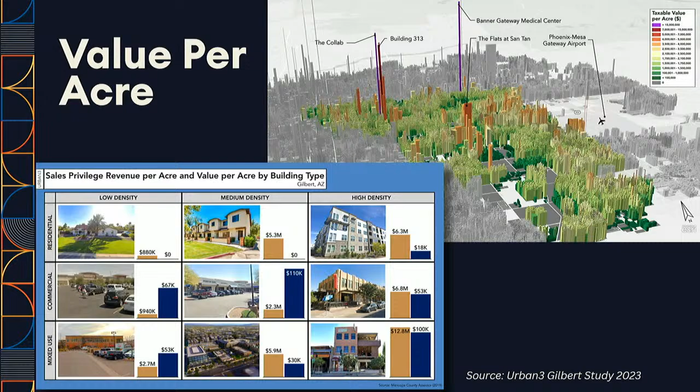So why is maximizing value per acre important? Gilbert is known as a suburban residential community, but most of its revenues to operate the town are collected through sales privilege taxes. This highlights the need to support density in industry-focused areas like the Heritage District, which supports the tax base. By increasing the productivity of industry-focused areas, it supports the quality of life expected by the primarily residential community without adding items like primary property taxes.

What Urban 3 likes to say is stacking your stories means stacking your dollars. Increasing density by just one or two stories, as proposed in this text amendment, can have significant impact on productivity and allow Gilbert to continue to be fiscally sustainable and support responsible growth. You can see the heights are really high in the Heritage District with the Collab and Building 313. And I will kick it back to Kristen.

In addition to the Urban 3 presentation being a driving factor into our request for increased heights, we also took a look into the redevelopment plan, where we ask for the goal of an 18-hour downtown. An 18-hour downtown is essentially a location where you can live, work, and play all within the same area without having to leave that district. In an area like the Heritage District where the parcels are often so small, it makes sense that instead of being able to have a horizontal mixed-use development where you have residential over here and employment over here, you need to build up because there's just not the space to build outwards.

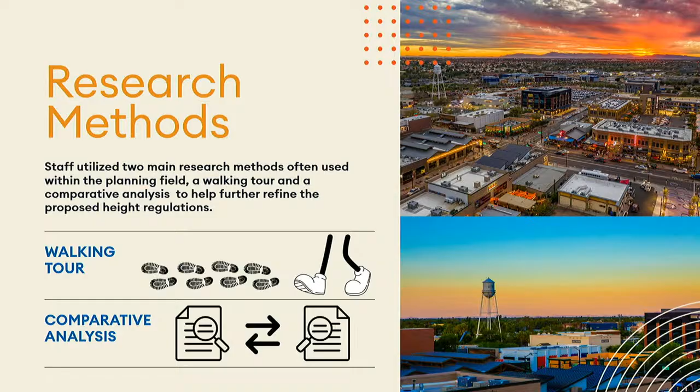In addition to the research already mentioned, we also went on a walking tour of the district, largely because the water tower is a big point in this conversation. It's always asked of us to preserve the view of the water tower, but the question is where are we preserving that view from — pedestrian scale, vehicular scale, outside the district? For this purpose, we went on a walking tour to gain a perspective from the pedestrian scale.

I took 6 pictures from that tour. You can see the water tower is visible from a handful of locations with the current development, but there are also a handful of locations where it is not visible.

All right, and then moving on to the community research that we conducted, we chose these communities largely due to their proximity to the Phoenix area. Some of them are identified benchmark communities, and a good chunk of them are just communities of interest.

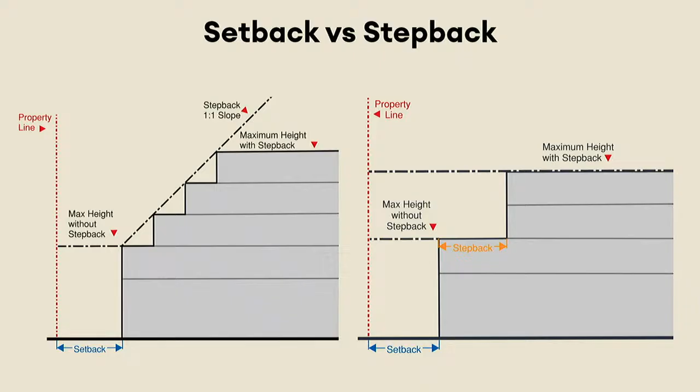The top image is the Chamber site, Gilbert Road and the Railroad, shown at 55 feet. This is a conceptual 3-story building with about 53,000 square feet of parking, ground floor commercial at about 9,000 square feet, with office and amenities above at about 43,000 square feet.

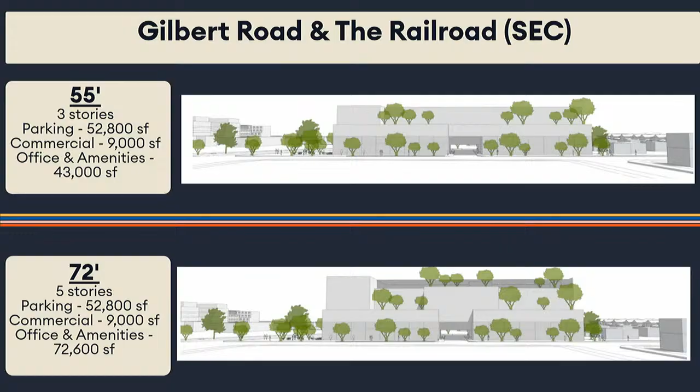If you took that building and added 2 stories to it, your parking would remain the same, your ground floor commercial would remain the same, but you would increase your office and amenities to 72,600 square feet. The bottom image is shown at 72 feet.

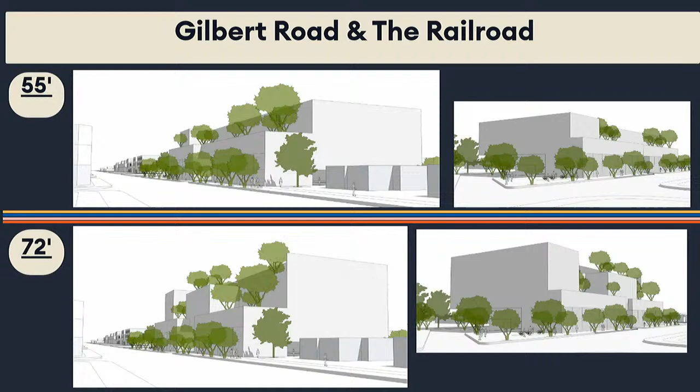And just some additional renderings showing what a step back could look like with this development, and then that development in a larger context of the district.

All right, and then the second site we chose is Vaughn and Oak on the northwest corner. We chose this one because it's a site that could potentially implement your bonus height of up to 90 feet.

The top image is 55 feet, 4 stories. It includes 82,000 square feet of parking, 18,600 square feet of ground floor commercial, with 225,000 square feet of residential stacked on top. It also includes a row of townhomes along Oak.

If you took that building and increased it to 7 stories, you would gain an extra 3 stories in residential, bringing it to 335,000 square feet. Your commercial would remain the same since it's ground floor, 18,600, and your parking would then increase to 128,000 square feet while also keeping those townhomes.

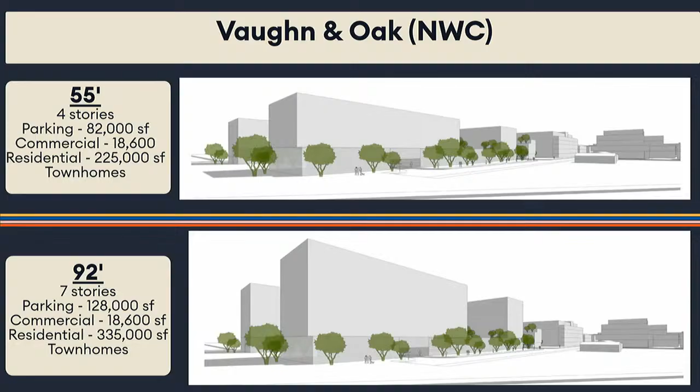And then just those developments in a larger context of the district.

All right, and then just to highlight what the next steps are after this. This is our first step after the initiation that occurred with Planning Commission last month. So we'll bring it to you for study session this evening. Following that, we'll take it to Planning Commission for study session, bring it to Chamber of Commerce for their feedback, and then public hearings with yourselves, as well as Planning Commission, and then study session with Town Council, and finally public hearing for Town Council if we get that far.

Then, just to summarize, our request this evening is just a discussion on possibly increasing the height within the Heritage District, and I am open for your questions.

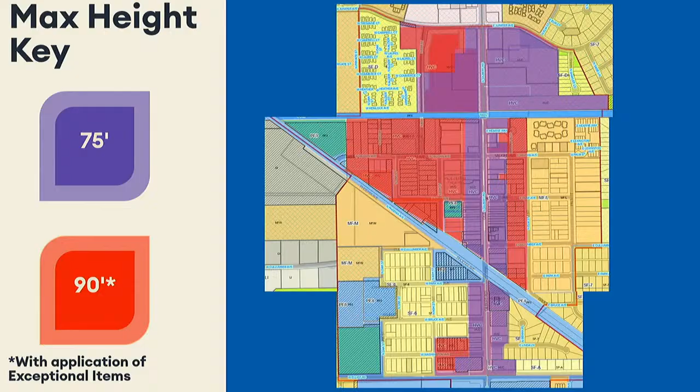I've been to some of those cities that you guys looked at. Cherry Creek, I was there in February of last year. I love walking that area, it's so fun to be in, and that's not necessarily downtown either, it's just a different area. But the height in that area actually gives it its charm, and you see a lot of different heights.

Even the single-family homes go tall. There's a lot of 2-3 story townhomes in the middle of this area because the height is encouraged and promoted there, and it becomes more of a village, more walkable, less car-focused. Interestingly, the parking requirements are significantly lower in those places than in suburban areas, and so I support more height. I think it's a key metric of downtown area, and I hope that the future discussion will be whether we expand the boundaries of the Heritage District so that other adjacent areas can avail themselves of that height opportunity as well.

So Chair Kendall, Commissioner Baugh, I'm going to respond to just a couple of the items you touched on: distance as opposed to touching Gilbert Road. That is something we can definitely explore after this. I know that in our GVC zoning district, near the Cooley Station area, the maximum height is actually 90 feet, but if it's within 75 feet of a single-family zoning district, they can only go to 60. So something like that could potentially be incorporated here as well, but not necessarily single-family, more so Gilbert Road.

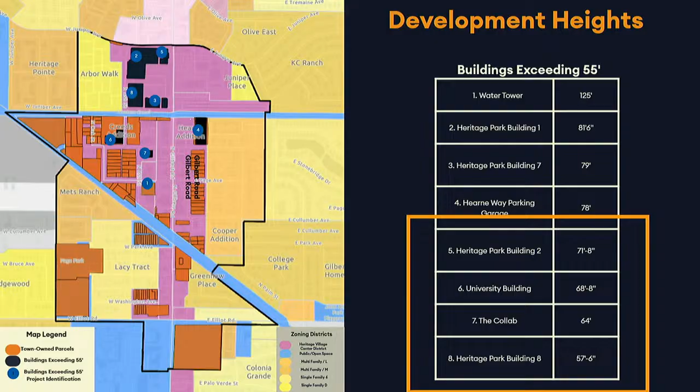Sure, great answer, thank you—a very political answer. In regards to parking, I think every commissioner touched on this, Commissioner Baugh talked about, let's call it the piano key lots. If someone were to go like 75 feet, does that mean they've got to dig a hole so people can park underneath there?

Okay, so they would still be eligible for the AUP or commercial. The AUP only applies to commercial retail, things like that—it doesn't apply to residential. Residential needs to self-park. So for lots that size, they could apply for the AUP, but if all the parking we currently have is eaten up at that point, then yes, they would need to self-park by going underground.

Okay, then I also had a comment on art, because that's very much in the eye of the beholder and what that looks like, but I think you define that. Mike had addressed the economic impact of that. For example, we saw a couple buildings there, the Collab and the university buildings—are those listed here as an example of how much revenue is being generated from those?

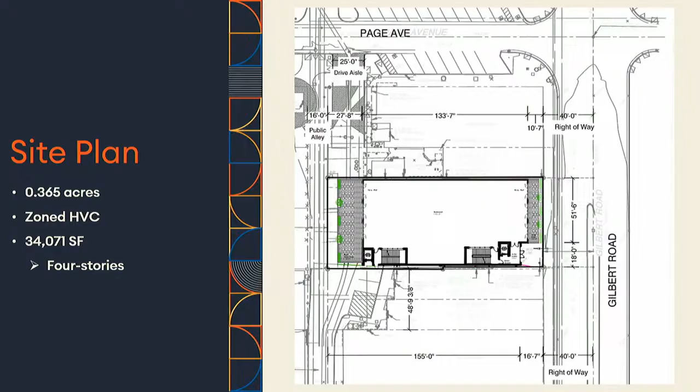The site is currently 0.365 acres. It is zoned HVC, or Heritage Village Center, and the proposed building would be approximately 34,000 square feet in size. It will be 4 stories. The first floor would contain a restaurant with outdoor seating areas, with an outdoor patio at both the east and west ends of the building. The second floor would be a retail showroom. The third floor would be office, and the fourth floor would be restaurant with a rooftop terrace.

Landscaping within the Heritage District is typically a little minimal compared to other areas of the town. However, they are proposing some landscaping with this project, primarily found on the east and west patios. The landscape materials proposed are Texas mountain laurel for the trees, and Huntington Carpet rosemary and dwarf myrtle for the shrubs and ground cover.

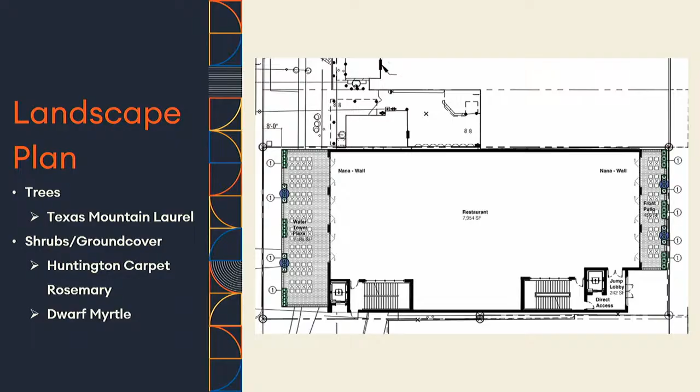One thing I'd like the commission to provide feedback on is that while Texas mountain laurel is an approved tree species within the Heritage District Design Guidelines, when you look at some of the other street trees up and down Gilbert Road, particularly with some of the newer developments, you'll see they've used red push pistache, which is the street-themed tree along Gilbert Road in the Heritage District. It's a pretty hardy, drought-tolerant tree, and it's a very nice-looking tree, particularly in the fall as the leaves start to turn colors.

I'd like to get some feedback from the commission on street side landscaping. Gilbert Road, in the Heritage District Design Guidelines, is the street section designated in that document, and it calls out a landscaped area or zone between the roadway and the sidewalk to provide buffering and enhance the pedestrian experience. So I'd like feedback on incorporating landscape materials within that zone along the Gilbert Road frontage.

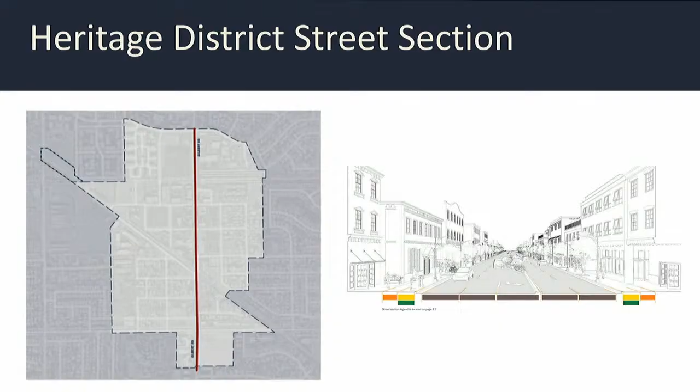With the building elevations, they're proposing a 4-story building, 55 feet tall, but actually 60 feet to the top of the mechanical screening, that's the area popping up you see on the drawings. They are proposing a mix of materials, including fiber cement panel siding, red masonry brick, and CMU block.

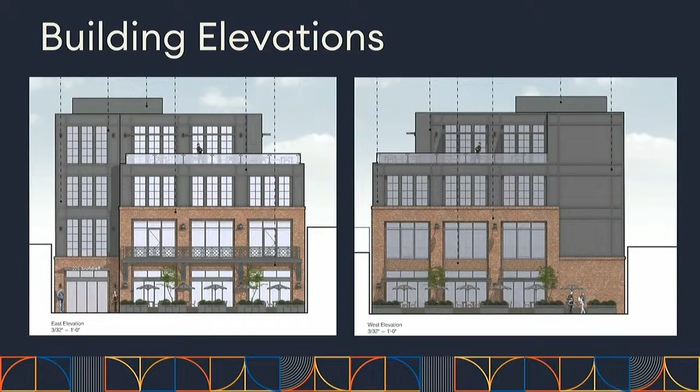On the east and west elevations, the Gilbert Road and Water Tower Plaza facing sides of the building, those are primarily fiber cement paneling and red brick materials. At the balconies and rooftop terrace, the balconies will have metal railing, and the rooftop terrace will have clear panels.

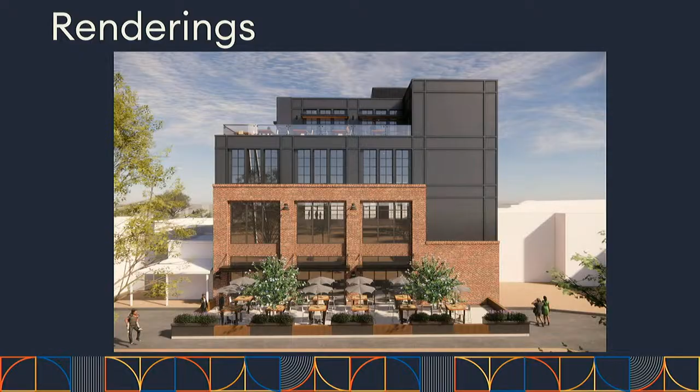I have some renderings of the building in context with the adjacent buildings so you can see how it fits with existing development. This is the Gilbert Road frontage we're looking at here. This is the west side of the building, which would be facing the Water Tower Plaza.

I'd like to let the commission know this proposal is in its first review with staff. We're bringing it to you to get input on the elevations and landscaping, to incorporate that into staff comments as we send them back to the applicant. That concludes my presentation, and I'd be happy to answer any questions.

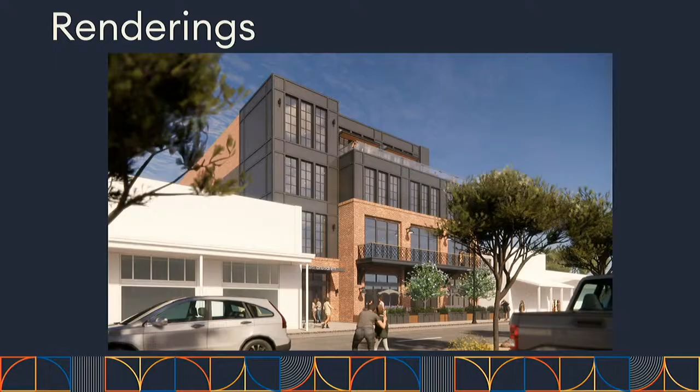I love the red push pistache as well, but I think if this is a tree that's already approved, I think the rendering looks nice. I don't think we need the same tree everywhere, so I'm fine with what they've proposed if that's the tree. If I could, yes, that would be a Texas Mountain Laurel in the rendering.

Okay, and then regarding the elevations, let's see, it's the south elevation, right? Yeah. I'm good with the north elevation. I'm good with the south elevation too.

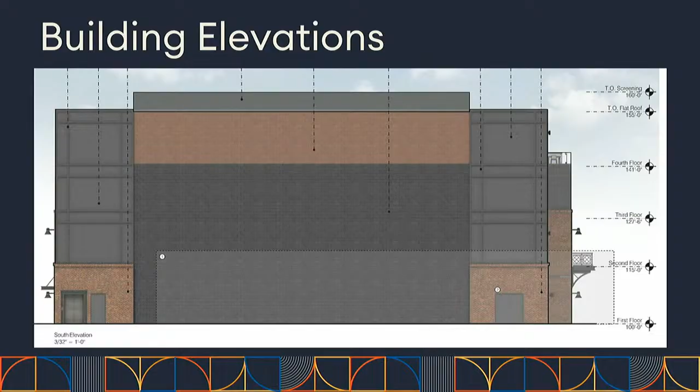I think if you're wanting more opportunities for design options, you could run a layer of honed block similar to the lines that you're seeing on your perimeter. What were those panels, a concrete? Fiber cement. I think that's an opportunity. I don't like to give direct guidelines on design, I like design teams to have flexibility. But you've got those perimeter lines that you could, within the same material, just hone it, and then you've got more lines carried through from east to west instead of having it kind of boxed out in the middle.

But I think the material selection is nice. Thank you. Commissioner Baugh, Commissioner Bigelow, any questions?

When we looked at this project last year, there was a lot more, there were trees and a lot more greenery input, and the building overall, I'm assuming, is a similar height, but is a completely different style. Do you know the reason for such a drastic change in the overall concept or style of the building? I don't know, pardon me, Mr. Chairman, Commissioner Bigelow, I don't know specific reasons other than that perhaps the owner was looking to go in a little bit of a different design direction than what was previously approved.

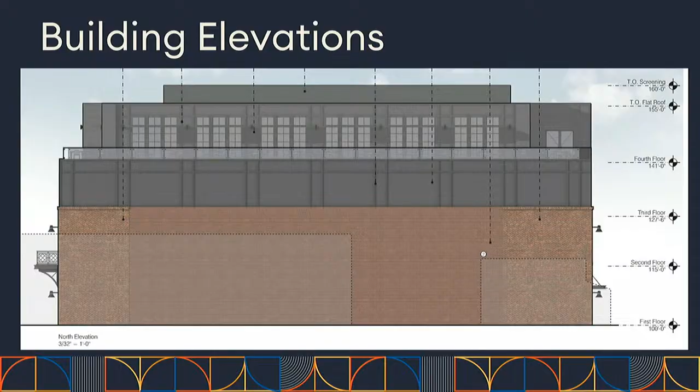As far as the parking goes in the back, I do not know, nor is it my job to dictate what can or cannot be done. I know that the property line extends out pretty close to Water Tower Plaza, and I don't know if there's an easement there for cars to go back and forth. But what I think would be very helpful would be to see the image you have pulled up and exactly where the footprint of the building ends. I'm assuming that in the rendering in the packet it's somewhere around the depth of a car, but it could be more. I don't know. Does that make sense?

Yeah, I can't imagine. The way I look at it is that his parcel can develop for the footprint that's allowed under the zoning code. And if the town is using that area on his private land for some access route, that's a private matter those folks have got to take up. But within what we look at in the zoning code, HVC, and this design, he should be able to move forward with whatever building he wants as long as it fits within that box. Unless there's a specific easement or right-of-way?

Correct, or the town purchases one or negotiates to obtain one for it. Gotcha, and so per this rendering, it probably is going up to the property line. Not necessarily, there could be a drainage easement there. I don't know, maybe it's not a parking easement. Or a major utility line or something. Yeah, well, I guess it's just landscaping, so either way...

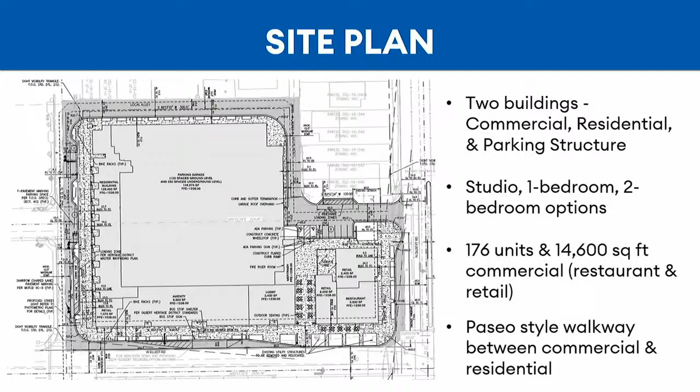A large chunk of that is found at the corner of Gilbert and Elliot, but there is a small portion found at the corner of Ash and Elliot as well. Between these two buildings, there is a Paseo-style walkway that is connected through a structural terrace.

For the Gilbert Road elevations, where you used to have a parking structure that took up the entirety of that elevation, you now have parking only on the ground floor, with units stacked above that. Staff does still have some minor concerns with the material diversity along Gilbert Road.

With the parking structure, a huge concern was that it was primarily stucco. There wasn't a lot of diversity, it wasn't overly fun to look at, and it faces Gilbert Road, so it should be better. So we've just asked that the applicant incorporate a bit more brick or some other material into that, which is a condition of approval in the staff report you were presented.

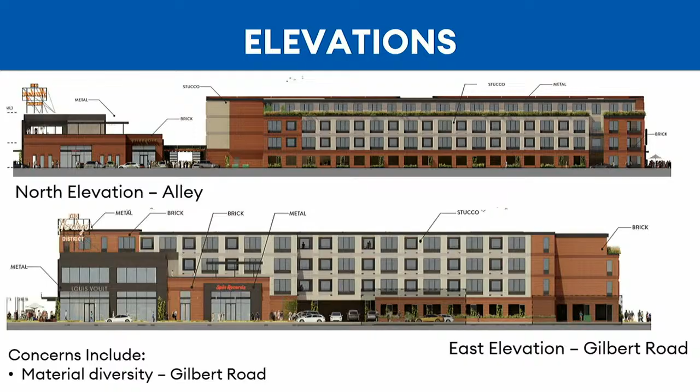For the alley, this is demonstrating that the ground floor is now brick — I don't recall if it was before, I apologize — but that ground floor is now parking, so you can kind of see the little parking windows along there.

All right, so these are the elevations for Elliot Road and for Ash Street. We have kind of the same concern about material diversity along Elliot Road. We've asked that maybe they remove some of that brick, place it along Gilbert Road, and incorporate a bit more stucco or metal paneling to break up the amount of brick. Again, that's a condition of approval in the staff report.

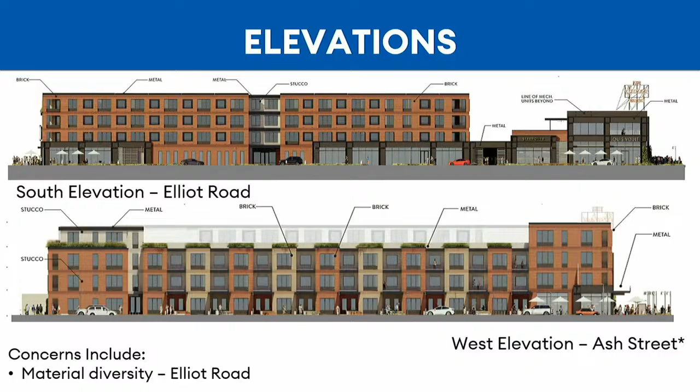The Ash Street elevations are seen on the bottom, and with that, I will highlight that there are two different options for the Ash Street elevations. They're very minor changes, mostly due to color.

The top option has your brick color alternating 1 to 1 to 1 to 1, whereas the bottom is 1, 2, 1, 1, 1, 2, 1. Staff prefers the bottom option, option 2, but we wanted to present it to you as well to see if you're in agreement with that or if you would prefer a different option.

The bottom option, even though it's still kind of a pattern, we feel like it just helps break up that regimented feel that they were achieving with option 1.

These are the close-ups of the Ash Street elevations. One of the requirements from the development agreement is that it needs to be of a brownstone style. Originally, the brownstone was kind of lacking, so we had a few meetings with the applicant, and the solution we came up with is a minor stoop, and they've incorporated a brick base to the railings, which is often found in brownstone-style homes. Staff feels this does meet the brownstone feel requirement for the development agreement.

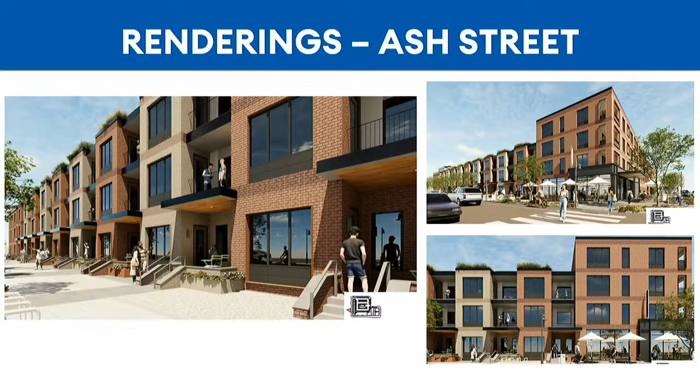I would like to point out that when you saw this at study session, there was another application running concurrently for a reduction in parking. That is no longer being requested. They are actually exceeding their parking requirement by 3 spaces.

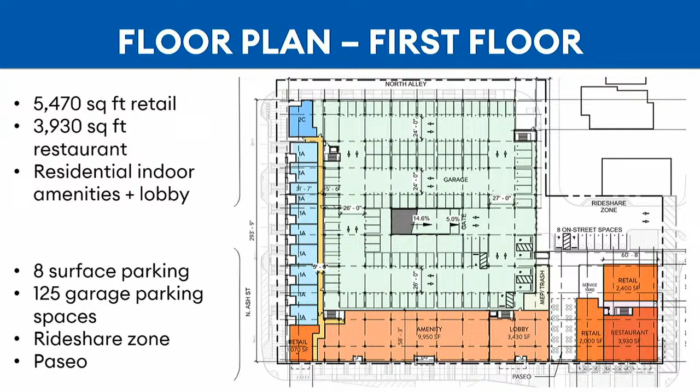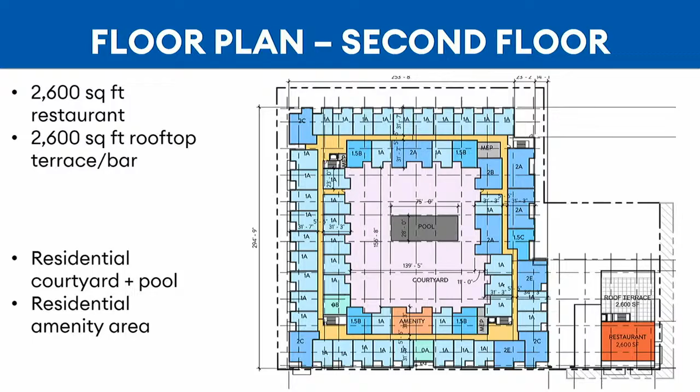This is the second floor, so 2,600 square feet of restaurant on the corner of Gilbert and Elliot, and then 2,600 square feet of a rooftop terrace and bar. You also have your residential courtyard and pool area, as well as an additional residential amenity area.

Third floor, you're going to find just residential units. Fourth floor, also just residential units, but it's important to note that you do not have fourth floor units anymore along Ash Street. That will be restricted to just 3 stories.

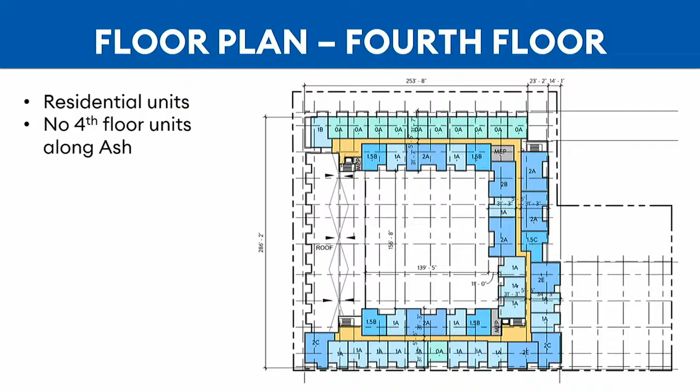So with this, there was a design review, which is where we are today, and there was also a conditional use permit that accompanied it. On July 16th the Redevelopment Commission voted on the conditional use permit, and August 6th Planning Commission voted on the conditional use permit.

At those hearings there was some public comment. There were 2 speakers at each hearing, both opposed to the design of the building. A large concern was that the design was not meeting the intent of a brownstone style along Ash. There was also some concern about the lack of vertical mixed use and how they are now doing horizontal mixed use, and concern that the design presented during the RFP process is not the design the applicant chose to go with.

Staff is not concerned with the RFP design. The applicant is meeting the design guidelines. We feel like the design presented is a good design.

At study session, to summarize some of your concerns: the Gilbert Road elevation needed improvement, largely the parking structure; the design was too regimented; Ash Street needed some work specifically to meet those brownstone row-like requirements; Gilbert and Elliott needed to be more grand; and that we are missing the rooftop sign.

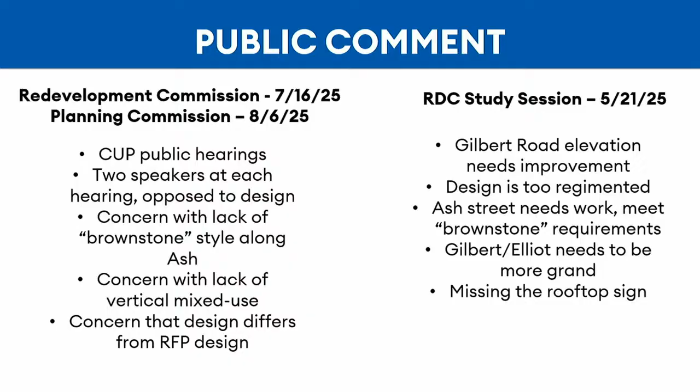With that, we do recommend approval of DR 2524, the South Anchor site, and I am available for your questions.

Perfect, thank you, Kristen. Would the applicant like to speak at this time? They do have a presentation, yes.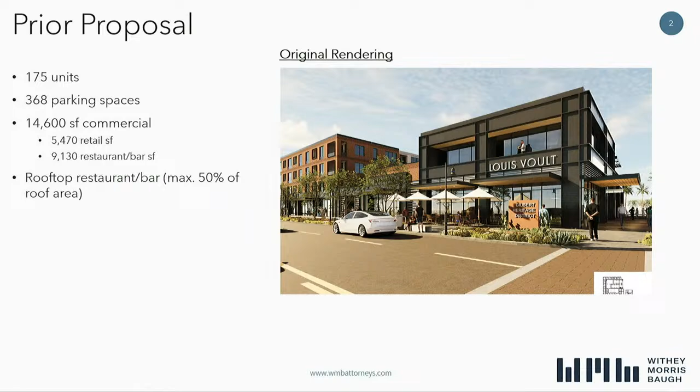We came before you in June and received quite a few comments and good feedback, not only from the commission but from the public and residents in this area, that largely focused on increasing the parking, improving the garage facade on the east side of the multifamily building, which has prominence or visibility from Gilbert Road. Some comments related to enhancing the architecture, increasing the brick, providing a stoop element on the west side on Ash Street to meet that brownstone row house style aesthetic, and providing additional variation in materials and colors. Another thing we heard was reducing the building height along Ash Street as it's adjacent to that Lacey track, existing residential.

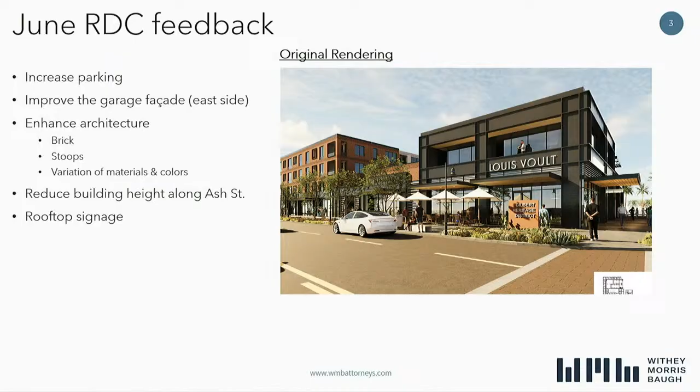And then, as we heard Kristen talk about, the inclusion of signage on the hard corner, kind of a welcome to the Heritage District feature, which we've included on these renderings, but again, that would be part of a sign plan that would come before you. So I think the team did a pretty good job of hearing the feedback and incorporating it.

I think we really have improved this project, and the feedback we've received has made this a better project. So what we have before you today is 176 units, only one additional unit. We did increase the parking by about 25 spaces, so there's now 393 spaces. As Kristen mentioned, no longer need a parking reduction. Commercial square footage remains the same. I think probably the biggest change is that the project now includes an underground parking garage, so the bulk of the parking is below grade. And that allowed us to do a couple key things with the project.

One of which is we reduced the height on that Ash Street frontage, so we only have 3 stories there, where it was 4 stories and 48 feet before. And then we were able to change that east garage facade, where before it was kind of an uninteresting facade with just the side of the garage facing Gilbert Road. Now it's been wrapped with the multifamily and has a more integrated feel and better aesthetic from that vantage point.

So I'll move through these quickly. Kristen kind of highlighted this, but below grade is a floor plan covering the entire property. You have the underground garage. The underground parking really does encompass the bulk of the site, with the exception of the drive aisle and entrance to the underground garage.

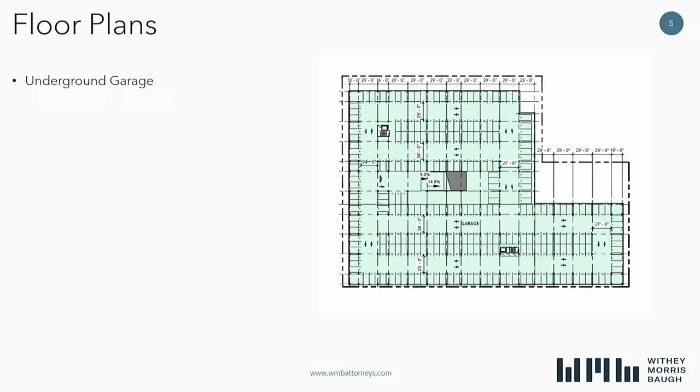On the ground floor, you have multifamily units along Ash Street. That was the subject of the CUP that came before you and was ultimately approved by Planning Commission. On the Elliot Road frontage, you have the multifamily amenity space, in addition to some retail, and that retail and restaurant at the hard corner.

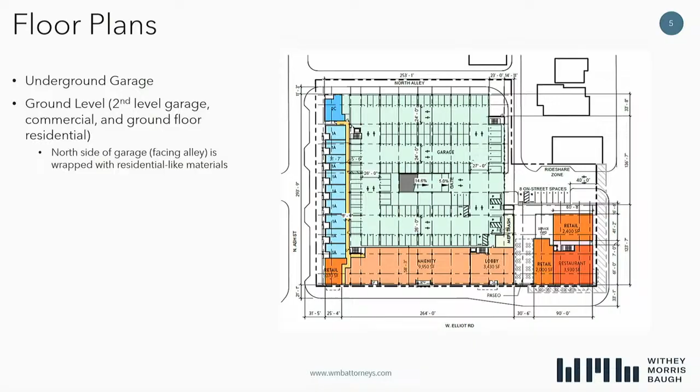On the north side, you have the garage along the north alley. However, the design on the ground floor is meant to mimic and have the appearance of residential architecture. On the second floor, you have residential wrapping the multifamily building. In the interior, you have the courtyard and pool, and then at the Gilbert and Elliot Road corner, you have the rooftop of the restaurant. Third floor residential and fourth floor residential. Again, I think a key component is that excludes Ash Street, where we reduced that height to just 3 stories.

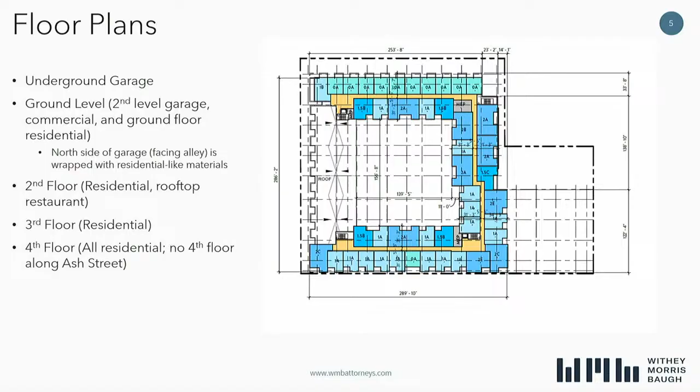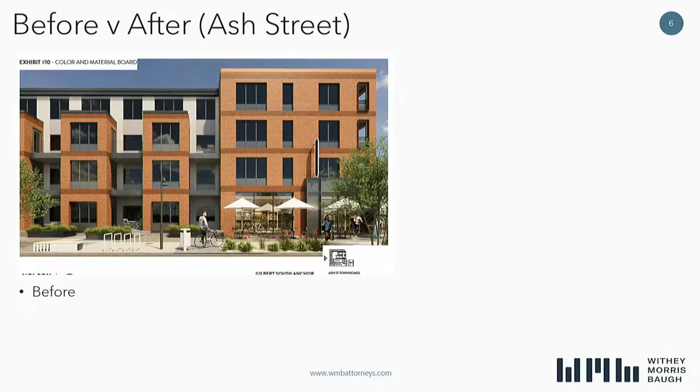Here you can see the original proposal for the building facade on the elevation on Ash Street. With the new proposal, you can see that we've eliminated that 4th floor, provided some additional architectural interest at the roof line with additional plantings along the street frontage, and at the corner added some metal paneling along the roof line. We've also incorporated those ground level stoops to bring that kind of brownstone feel and activate that street frontage, creating that more urban feel.

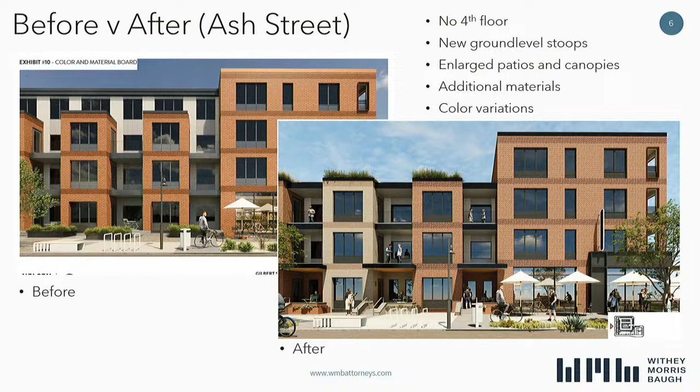We enlarged the patios and canopies for the patios on the different multifamily units on the 2nd and 3rd floor. It kind of has a cantilevered canopy feel. We added additional materials and created additional variation with the colors. Again, here's the before and the after, which gives you a sense of the changes there.

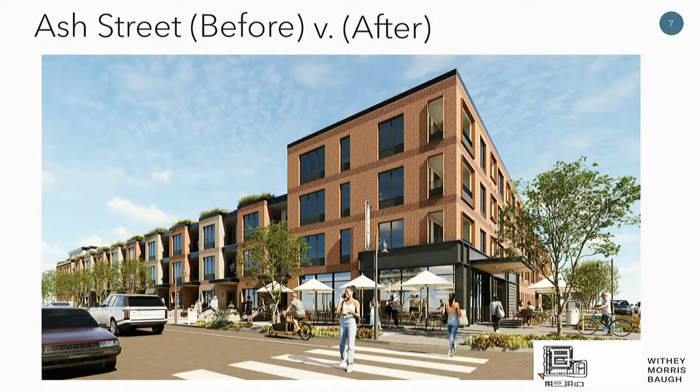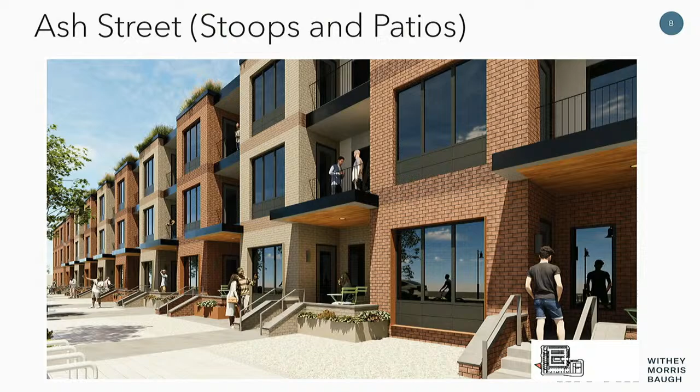And there's a more focused presentation of what these stoops will look like. I think this does better meet that intent for the brownstone and row house feel. I know there was some discussion about whether it's brownstone or row house, and I think it's sort of interchangeable from our perspective, but this does better achieve that intent. And then the other key component is that east side of the garage.

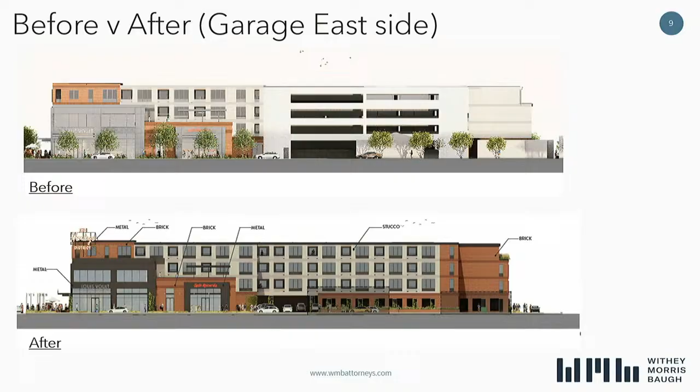This is again the vantage point from Gilbert Road. So where previously you had just the garage on that eastern elevation, now you have that wrapped multifamily, which provides a much more integrated and more cohesive aesthetic. At the ground level, you can just see that entrance to the garage on the ground floor, and with the wrap multifamily.

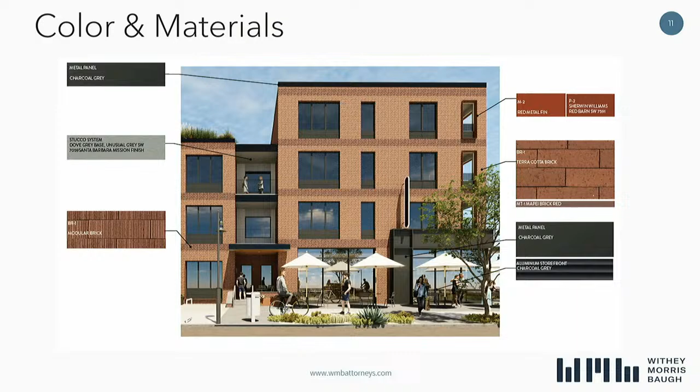For colors and materials, we've incorporated additional metal paneling, more brick with some additional stucco to create additional variation, more architectural interest on that Ash side. I wish I could take credit for this. I think it's a really good looking project, but if we do have any specific questions as to why some of these materials were chosen or where, we do have a member of the architecture team here who can address some of those more specific questions.

But just to wrap up, I think the changes that have been made really do improve the compatibility of this project, particularly as it relates to Ash Street next to that existing residential. We provided more parking, no longer need that parking reduction. Again, less height on that Ash Street frontage, a better fit with the context on that Ash Street side. We provided more materials and better variation along those different facades. We've improved the pedestrian design and created more activation of that street frontage with the stoops and the patios, creating that better street level engagement. And I think very importantly, improved the aesthetic perspective from Gilbert Road.

So this is consistent with what the town anticipated with their RFP and what we've discussed with staff, and it's been included in the development agreement. So I think it's a great project, and I think it will be a really important addition to the Heritage District. So happy to answer any questions you have.

Are there any members of the public that would like to speak on DR 25-24 South Anchor Heritage District? Mr. Chair, yes, we do have 2 comments I will bring over to you. Thank you.

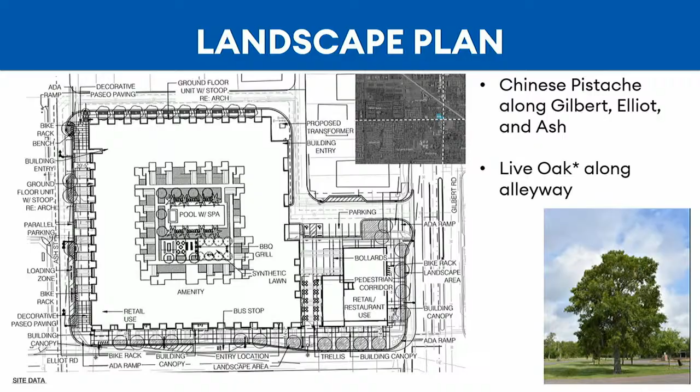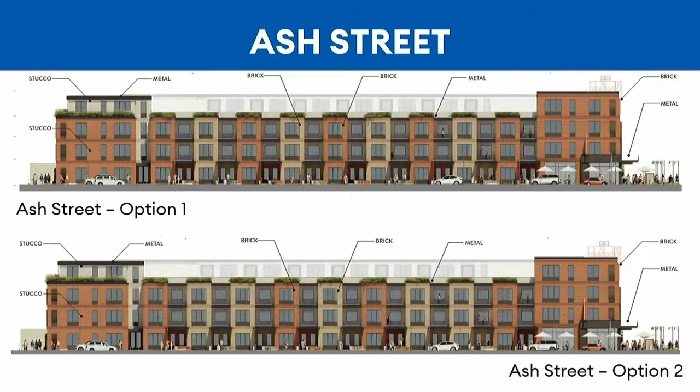The parking, I applaud that. It's always a big conversation on this board. Is that public? Will the public be able to visit the retail, visit the restaurants, or is that going to be designated for residents? Chair Kendall, it is both. They have their required parking for residents and their required parking for commercial and retail uses. Then the development agreement also required them to implement 45 additional public parking spaces in excess of what they are required to have.

And so the assumption is they would be marked reserved or specifically assigned? I don't know the specifics. I know we have asked at one point if they could sign them, or if it's just going to be first come, first serve. I'm not sure the process there, but they do exist. Sounds like an adventure.

I know in regards to, and we're not talking about it tonight, but the sign, can you walk us through what that process looks like? I've been a big proponent of making sure that on that hard corner we have some type of welcome sign. It was pictured here, and during various conversations we've talked about scaling down because the building isn't high enough to have, let's call it, an epicenter size sign.

Is that still in the plan? How does that work, and what does that look like? Yes, Chair Kendall, we've tossed around our options of how we can make a rooftop sign for this development work. It's still very early, but we've landed on the only process to allow this would be a text amendment to allow rooftop signs on 2 stories. Right now they're only allowed on 3 stories, up to 200 square feet.

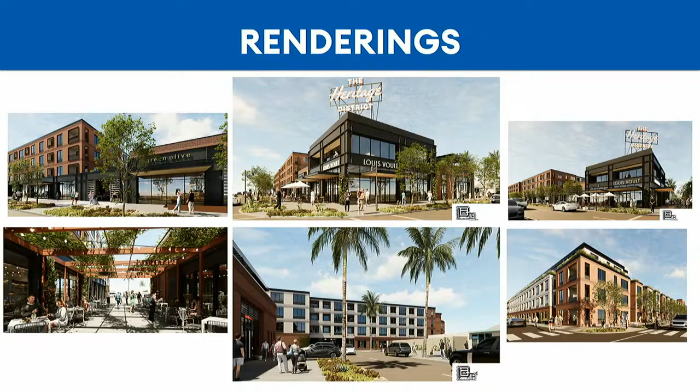Okay, and so then the building would be constructed to support that? Yes, yes. Okay, all right.

Just making sure. Any other questions or comments from the commission? Commissioner Rapp.

Going off of that sign question, would that text amendment apply to the entire zoning district, or would you be looking at this site specifically? Sure, Chair Kendall, Commissioner Rabb, the way rooftop signs work currently, we have segments that they're allowed in. There are 3 different segments within the district, and only 1 rooftop sign is permitted per segment.

So the north segment is Heritage Park, they have a rooftop sign. There's not currently a rooftop sign on the 2nd and 3rd segments. So this would be within that 3rd segment, and we would keep that quantity. We would just now allow it to be on a 2-story building instead of a 3-story building, opening up more buildings to be eligible for it.

Okay, thank you. Any other questions, comments?

Okay, do I have a motion and a second for DR 25-24 South Anchor Heritage District? I motion to approve DR 25... DR24 South Anchor. I have a second. Second. Let's go ahead and vote.